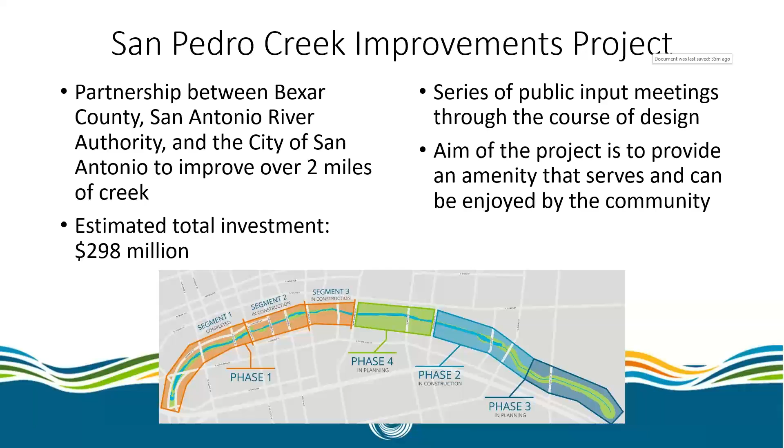It's very important to note that this project is a partnership between Bexar County, the City of San Antonio, and the San Antonio River Authority, improving a little over 2 miles of creek, about 2.2 miles. There's a phase map there, and the segment we're talking about is shown as segment 2 in phase 1. The estimated total investment is about $298 million. Bexar County is the primary funder, and this is a flood control project. However, our local leaders and elected officials had a vision: instead of just expanding the channel into another trapezoidal channel, they wanted to create a public amenity for the people who live and work in San Antonio and Bexar County. As such, there were a series of public input meetings throughout the course of design to get input from the community. Our aim is to create an amenity that serves our community and tells the history and culture of San Antonio. Next slide, please.

Flood control is really the main goal. San Pedro Creek catches about 45.6 square miles of drainage, direct runoff throughout the downtown area, as well as the stormwater collection system that drains into the creek. So even a very small rain event can cause a dramatic rise in the elevation of the creek's surface. Right now we have about 30 acres in the downtown area that flood during a significant rain event, and we're trying to eliminate those flood events. That's not the only project goal, though. Water quality is a core value of the San Antonio River Authority, and we have many features along this project that will help clean the water going into the creek. Economic development is also a plus with any public works project—from this investment, they're estimating about $1.5 billion in return over a 20-year period.

This was very much a grassroots design effort. We had a series of public meetings to get the community involved and get feedback on the design for the project. We ended up making some fairly significant revisions in response to that feedback, but we really want to demonstrate the culture and history of San Antonio. Carrie Brown will be talking a little later about the interpretive planning effort to do that representation. Next slide, please.

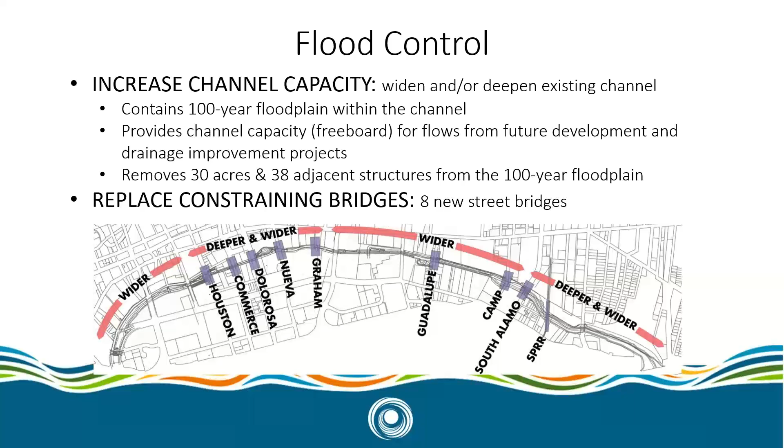Ultimately, the goal is to remove approximately 30 acres from the 100-year floodplain, and there are 38 structures currently in the floodplain that would be removed. To accomplish this, including the Houston Street Bridge right near the site and subject for this meeting, we're replacing about 8 bridges so that we can get the wider cross area under.

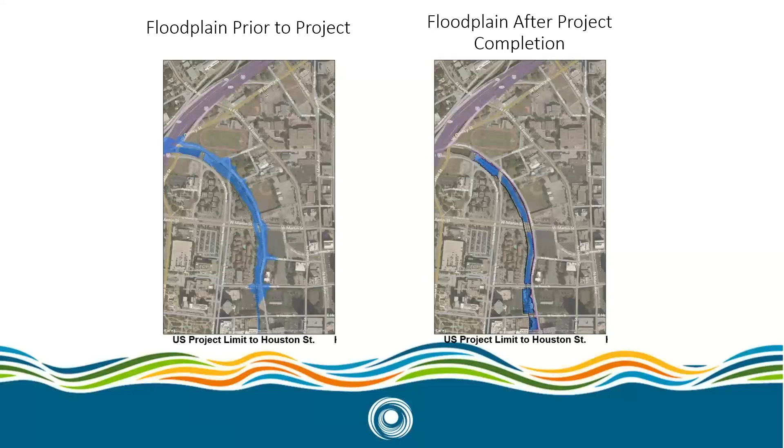Next slide, please. Real quick, these photos are showing the areas upstream of Houston Street. On the left is the before picture for the floodplain. You can see all along that area, we currently have some flows that jump the banks during a 100-year rain event. After construction, you can see the photo on the right. The intent is that we would contain that floodplain within the channel.

Next slide, please. So in early 2020, I believe it was around March, when they were doing construction near the corner of Houston and Camaron Street, there next to the Alameda Theater, they started to uncover some foundations.

And as we continued to investigate and the archaeologists got in there and continued to work with the contractor to uncover, we discovered it was a series of foundations, and there are several there.

Now, this discovery has stopped us so that we can see how we can incorporate the foundations into our design. And the design team have come up with several options that incorporate some or all of the foundation, also taking into account the project goals.

One thing that I think is very important is that we believe all the goals do represent a good historic representation of what happened in this area. We think that they all have a good representation and represent the culture and history of everything that happened here. The question is, which option will incorporate all of the goals and meet all the goals to the best degree possible. Next slide, please.

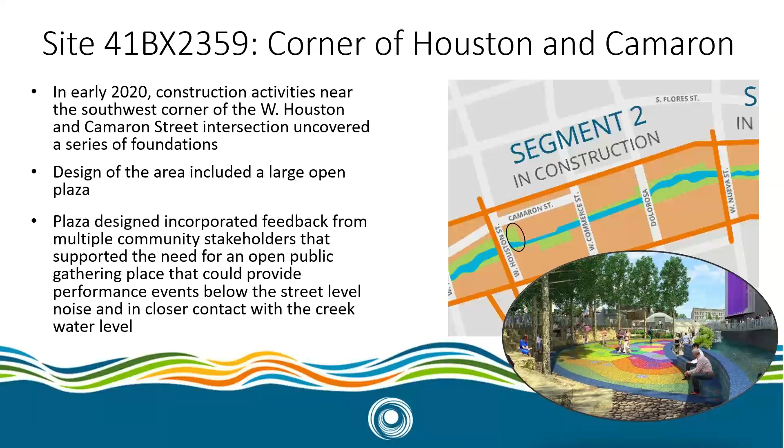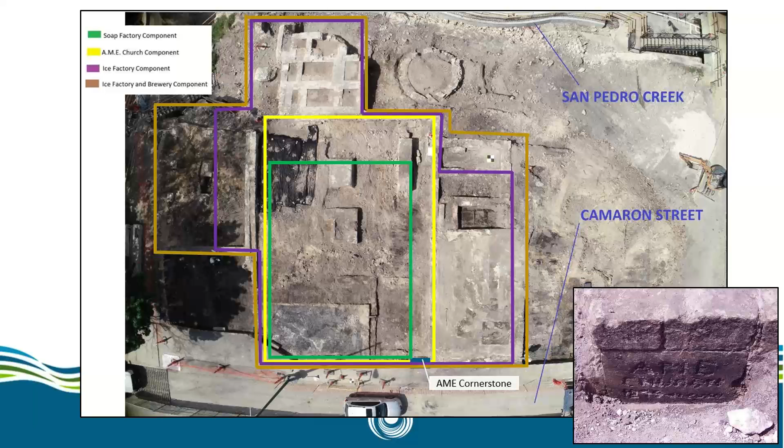Next slide, please. A quick run through the timeline. We are looking basically at a total length of occupation and use of this area that we are interested in, that is represented by these foundations, of roughly 57 years.

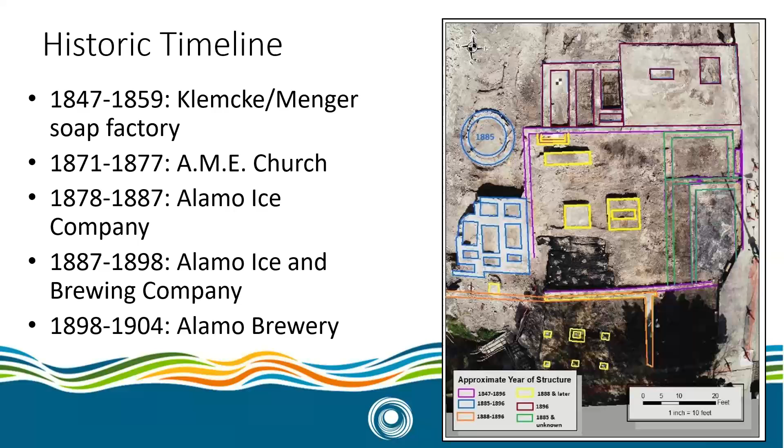Each component runs from anywhere from 6 years in length to 12 years in length, and really cover that 57-year period, beginning in 1847 and ending in 1904, when most of the complex is torn down and filled in, and later a parking lot is built on top of it. Next slide, please.

The very first, the oldest component, the occupation as we refer to it in archaeology, dates from 1847 to 1859, and it is the soap factory component associated with the Klemcke and Menger families. These are two immigrant German families who came to this country during the middle of the 19th century, right about the time when hygiene standards were increasing following the Civil War and the large number of deaths resulting from infections on the battlefield.

So when they arrived, the need for soap and increased hygiene was already present in the country, and they occupied a really important role both in Texas and in San Antonio specifically by the manufacture of soap, not just for their own use, but also for use by the larger population.

The first to own the property was Mr. Klemcke. He sold it in 1851. During the period that he owned it, he potentially built two structures on the site, then sold it to Simon Menger, not related to the Menger who owned the hotel. Mr. Menger owned it until 1859, when a flood of San Pedro Creek might have damaged one or both of those structures, and he moved his soap making facility further north on the creek, but he continued owning the property into the early 1870s.

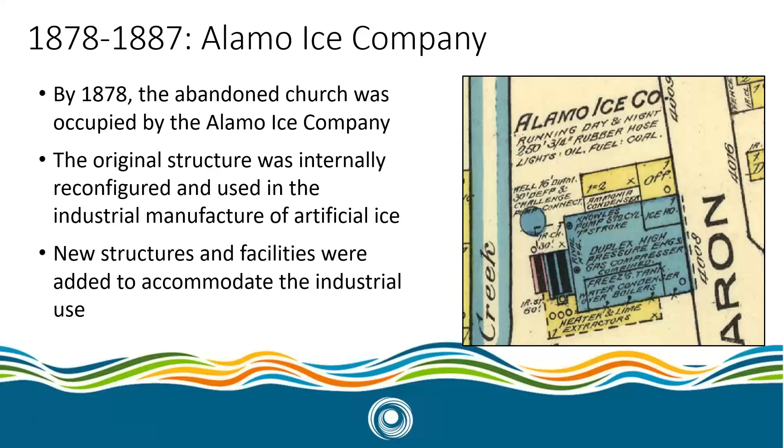By 1887, the Alamo Ice Company merges with, or has a marriage basically with, beer brewing. At this time, German beer brewing, lager beer brewing in particular, takes an important role in the States. However, because it needs cold fermentation, which is only allowed through ice and cooling, ice manufacturing and beer brewing become natural partners in this industrial process, and many ice manufacturing facilities couple with beer brewing to become this new, very efficient enterprise that allows for the growth of German beer brewing in the country.

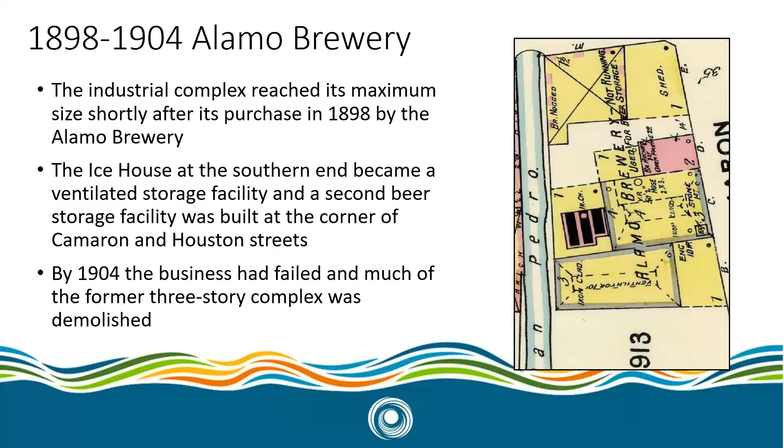So when we're considering the significance of the site regarding National Register eligibility, as well as State Antiquities Landmark designation, there are a number of criteria to take into consideration. Criterion A relates to events and specific historic trends associated with the site. Criterion B deals with individuals important to local history, the history of the site, state history, and national history. Criterion C refers to architectural importance and significance of the design itself. And criterion D addresses archaeological significance of the remains. This is an archaeological site because it's found below the ground, but it still could contain significant archaeological deposits, so we have to evaluate it in terms of all those criteria as well as criterion D.

As we are evaluating the site, we have to look at each component separately by itself. In our research, aided by the research of individuals from several offices, the Office of Historic Preservation, UTSA researchers, Clint McKenzie particularly, as well as members of the African American Community Archives and Museum, we have developed and defined that...

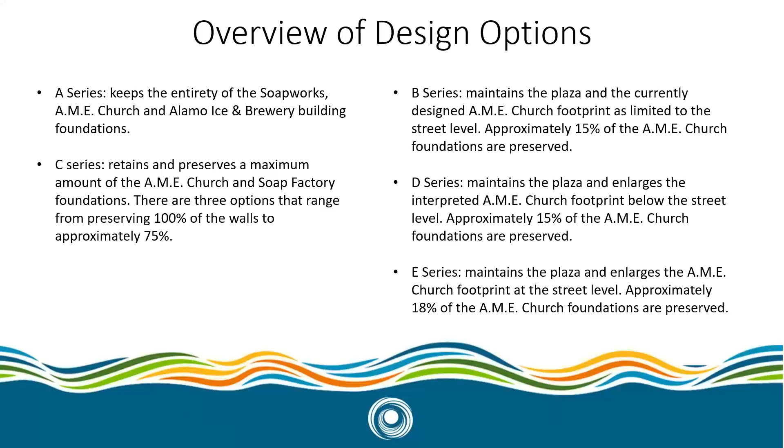And so we went through a series of options. I'll move on to the next slide because I think as we go through that, it explains it a little bit easier. But I did want to note that in most of the design options, the foundations that are preserved will be buried, and only surface interpretations of the foundations would actually be visible or seen by the public.

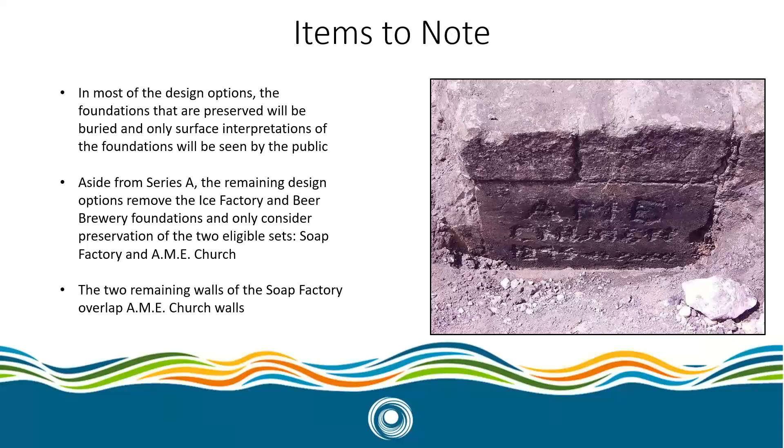And aside from the first option that you see, which is option A, the remaining design options really remove all of the other foundations other than the AME church and the soapworks factory.

So as we look at option A, which would completely redesign the current plaza area that we have there now, we would look at basically trying to encircle and protect all of the foundations that are there presently. And that's what this plan shows.

North is to the left, going upstream on the creek. Camaron Street is on the top, and Alameda Theater is on the lower part of this plan, and that'll be the same for all of these.

And in this particular approach, if we were to do that, we would actually have to go back in and narrow the channel that we've widened at this point, just to allow some degree of flow through the area. We'd have to take out the West Bank Paseo that has already been constructed along Alameda Theater. So that's what this represents.

Essentially, we'd still have to take care of the exiting that comes out of the east wall of the Alameda Theater, bridging across to the East Bank on the north and south. We would have to redesign the restrooms, probably just a single restroom and not the restrooms that we have now, and rethink how we treat the surface area of this particular scheme.

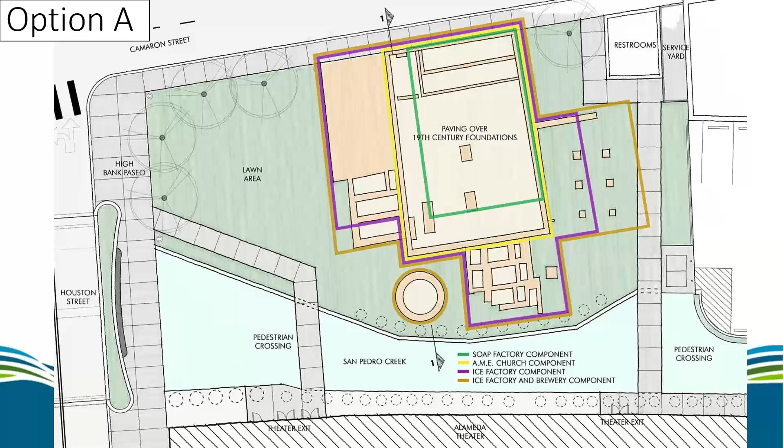If we could go to the next slide. And so the impacts on this, we show this right up front to know that if we try to keep everything that's there, it really doesn't meet the flood control project goals at all. It leaves no capacity in the channel to accept flows from future development, and there are already projects planned to alleviate flooding in upstream neighborhoods.

That's very similar for many of the projects, and Carrie Aver had mentioned that earlier. Any kind of flood event over 100 years is not going to be contained in the channel. And regaining the lost flood control would require substantial disruption of the preserved foundations, either to bore a tunnel beneath or to temporarily relocate the foundations to allow installation of culverts below them. So trying to mitigate the possible negative impacts on this is a very difficult challenge.

In doing that, basically we had a plaza, we still have the plaza design, but it would limit the capacity for events and programs that have already been designed. It would have the potential to reduce the amount of pedestrian traffic, less exposure to the history of the site, and we totally lose contact with the creek itself. It'd all be at a high bank. We would not have a low bank paseo, and that kind of intimacy of interacting with people and nature was something that was very important to this.

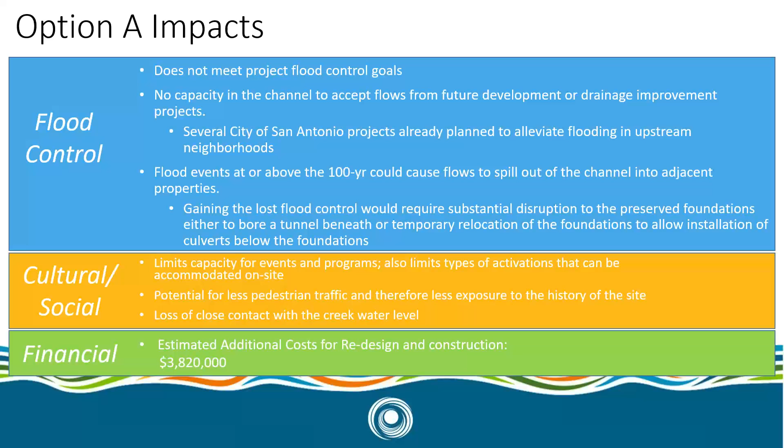The financial impact is considerable, thereabouts of $4 million, to basically go about making all of the changes to accommodate keeping the entire foundations. So that sums up option A, if we were to keep everything, and we can go on to look at a couple other options. Next slide.

So option B, basically this is the existing plaza design, and what you see in the top towards the right in the orangey area, that is the footprint of the AME church as it exists at the street level. The plaza itself steps down about 7 feet below the street level, and another 5 or 6 feet down to the water level. So this is kind of a mid-level plaza, and it would be carved into essentially what are the foundations of the AME church.

We show this because before we just had a surface treatment in terms of the paving for the footprint of the church. But in light of seeing the artifacts and knowing now the gaining significance of the memory of this church and the history that it had, we felt like making it a little bit more special, rather than just a change of paving pattern, would be important.

So option B1 shows raising up a low wall, kind of bench height, around it, just to buffer it off from the rest of the sidewalk. And option B2 would be the idea that you would actually excavate around the foundations and then have some sort of really elegant glass viewable walkway where you could look down on the foundations from the surface level. Both of those are two different approaches, but basically dealing with the footprint of the AME church at the street level and not having any impact, or marginal impact, on the current design.

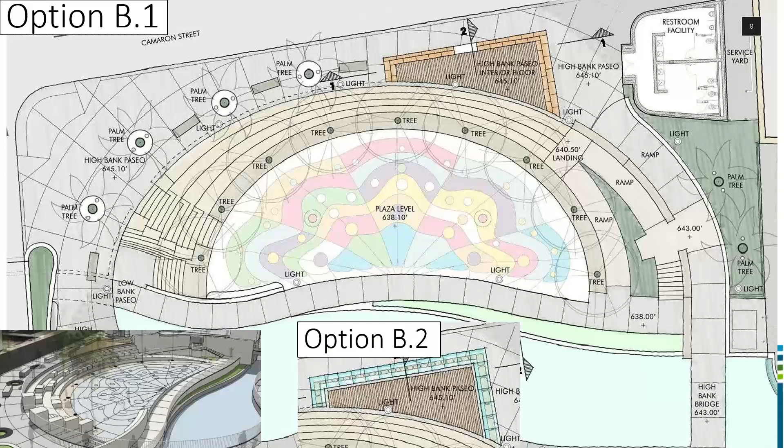And if you look at the next slide from this, really the impacts would be marginal. I just lost the screen. The impacts on that would be marginal. We may pick that up in a later slide in comparison.

But we moved on from that to think about something more substantial, because when you do see the history and you do see the actual archaeological site, you begin to understand the entirety of the church itself. And so for that reason, we looked at a series of options that basically try to preserve as much of the foundations as possible, if not all, of the AME church and soapworks, but also to be able to see at the street level the full extent of its footprint on the ground, the width and the length of it, to see what kind of space people were congregating in.

To do that, you have to retain those foundations, not unlike the first option, but a little bit more tightly. And so there's a very serious 6 foot thick pier wall out of concrete that has to be on its north, west, and south sides to protect those foundations from caving in and protect them from the flows of the river, the creek as it rises up. That footprint is about 40 feet by 60 feet. The foundation walls would be preserved underground and they'd be interpreted on the site.

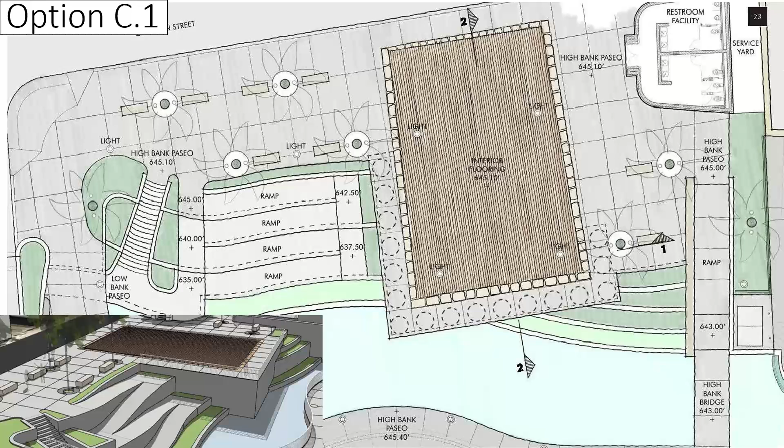We can move on to another alternate on this, which would be the next slide. This was to do two things: try to keep as much of the foundations as possible, and certainly still show a fairly full extent of the church footprint, just to understand its place in the space along Camaron Street.

But we would cut off the lower left-hand corner of it, essentially the northwest corner, and that would allow two things: the low bank paseo to continue on and engage an accessible ramp close to what had been originally designed, and it also starts to capture back some of the impacts on the flood control conveyance through there.

Now, we didn't do an entire new flood study on it, so I'm not saying this totally alleviates it, but it certainly may have still some impact, and it is an improvement upon the option we just previously saw.

And instead of having a ramp coming up at the street level, just having a grassy bank on the north side between Houston Street on the left and the AME Church on the right. And that is our second example.

And then we came up with one more variation, in the next slide, which should reveal. That is to basically still keep the full footprint by cantilevering a new structure out over that cut back corner that you see. We do have to start doing some other things, like lowering the grade elevations of the low bank paseo, having a little steeper slope on the grass.

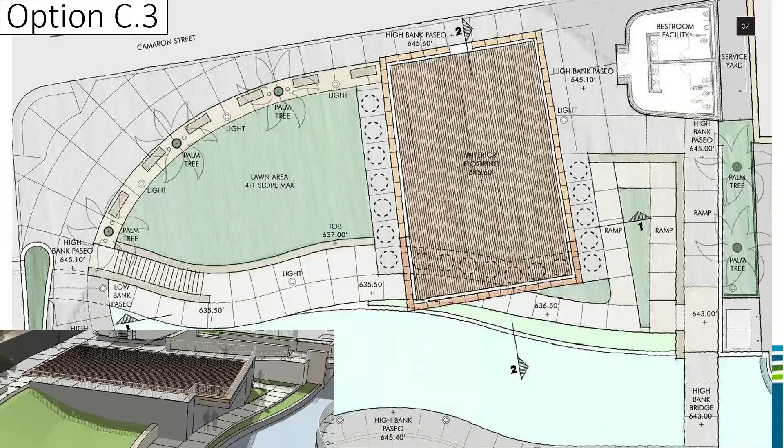So on those impacts, just to sum up, it still doesn't entirely meet project flood control goals. I think C.1 is more severe than the others, really repeating some of those same issues we have in A, where there's little or no capacity of the channel to accept flows. Floods above the 100-year could still spill out over the channel onto adjacent properties.

But in terms of cultural and social impacts, it does change the capacity for events and programs. There is an assembly space essentially within the footprint of the church at that point, but how it's used, it's not as ideal a performance space. It's at street level, not below, so there are noise issues and things like that. It's a little more difficult, not as ideal, and really not a performance space, although it's a reasonable gathering space for some events.

Of course, in option C1, there was all ramp and footprint of the church, but C2 and C3 add some green lawn and retain the low paseo, so a little more desirable. And all of those are really pretty much in the same financial impact range, about 2.2 million to 2.3 million.

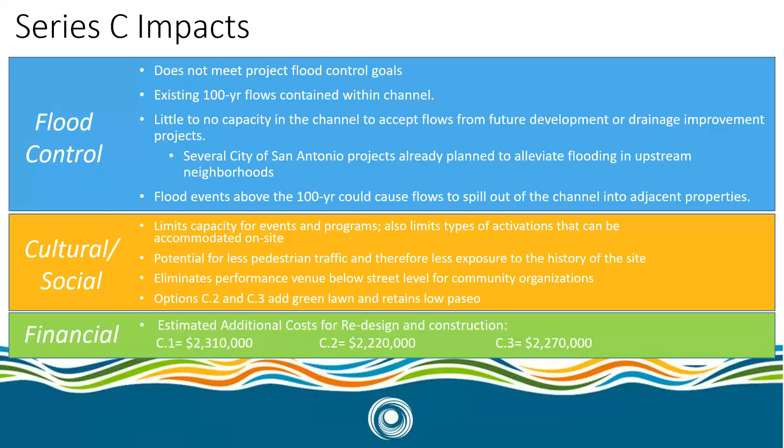So let's move on to several other options that we looked at. In these two options, we attempted to do something that is a bit of a hybrid of retaining foundation walls and also interpreting the footprint of the church, but still trying to maintain to some degree the existing plaza design and function.

And in option D, essentially that is raising up, showing the perimeter of the wall around on the north, east, and south sides along Camaron Street, but extending the footprint of it, the floor area if you will, of the church, out over the terrace, the stone terraces that we have along the perimeter of the plaza.

And the level of this would actually be lower, closer to the actual floor level of the historic church at this point. Keep in mind that the grade level historically is about 3 to 4 feet higher than it was 150 years ago. So this actually gets you down close to the level of the church floor, and then would expose the historic foundation walls around it, or actually walls at that point, because you're at the historic floor level.

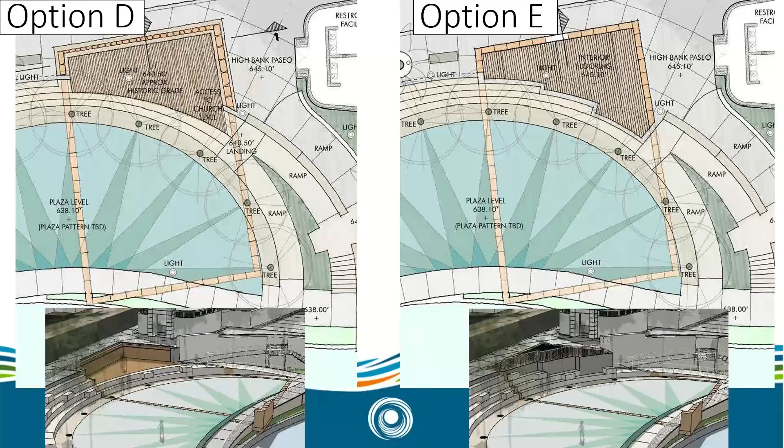If we move on to the next slide, the impacts of those last three that we looked at: they do, of course, all maintain the project flood control goals. That was the intent of investigating those. It does maintain the intended event use for the Alameda Theater, Texas Public Radio, River Authority. It provides the seating and shade that's needed. It's still a large public gathering place below the street noise and in closer contact with the water, et cetera. And it is ADA accessible for the low bank paseo.

It keeps that intact. And there is a range of costs on this. Really the first two, which were just keeping the plaza as is - the first one, more simple, just under 900,000; the other about 1.3 million. For the last two that we looked at, D and E, where it's more of a hybrid condition, both of them are basically about $1.2 million. Next slide.

All right, Steve, those were all the slides on the design options. Thank you. Right. Yep. Thank you. Now we'll move on to interpretive strategies with Ms. Carrie Brown, Public Art Curator.

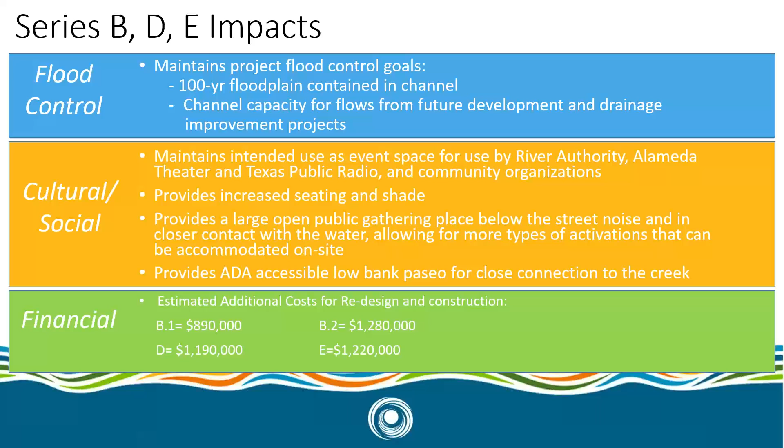Good afternoon, everyone. I'm just going to take a quick couple of minutes to go through the interpretive strategies that we have implemented at the park and continue to implement as different sections open. So next slide.

So first I wanted to start with our interpretive panels, a photo of which you can see on the right here. These are currently implemented at the park. We currently have 18 of them. And the topics for these panels come from our interpretive plan, which we completed last year with the help of a group of community experts. I believe Monica is going to touch on that briefly in her presentation.

But just to say that one way we can interpret information here at this site particularly is to have a panel dedicated to that site, and that is our intention. All of our panels are written by local historians, and then as needed we bring in subject matter experts to correct for accuracy and also to provide some additional information. And then we also take all of our panels to the Bexar County Historical Commission for a final review. So that's one strategy that we have implemented and will continue to use.

Another strategy is digital delivery of information, and this includes our website, which is spcculturepark.com. This is a place where we can include a whole slew of information for those who want to take a deeper dive. We can also link to other resources and organizations that are out there, again providing that deeper level of information for those who are interested. And this also includes our mobile app as well, which you can download for free.

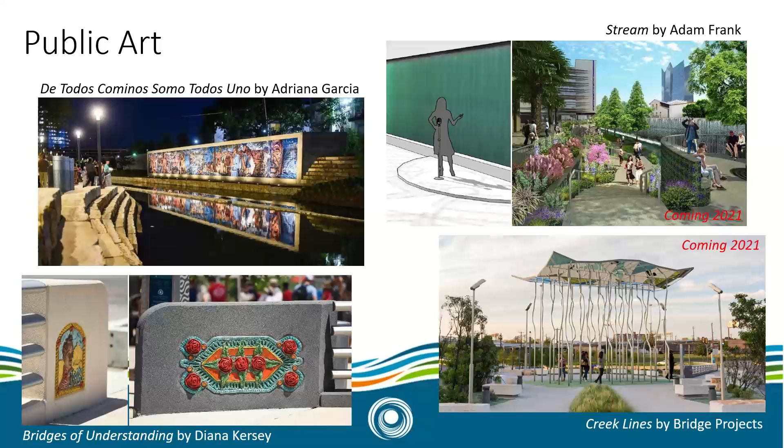Great, thank you very much, Carrie. Alright, so I'm just going to move on and talk briefly about our previous efforts of public involvement on the archaeological site in general.

We completed an interpretive plan for San Pedro Creek Culture Park that was executed by Dr. Ann Toxey of Toxey McMillan and Associates, as Carrie had mentioned a little while ago.

The interpretive plan is an initial step in the planning and design process for informal learning-based institutions like parks and other cultural facilities, where interpretation is used to communicate messages, stories, information, and experiences. So it's a decision-making process that blends management needs and resource considerations, visitor needs, and the desires to determine the most effective way to communicate a message.

It definitely incorporates elements of culture and history, and it guides the design of the project and also complements the master public art plan. So this effort entailed an extensive process for researching and collaboration, and it was a good year and a half in the making.

And for the interpretive plan effort, Carrie Brown and I facilitated a committee of 21 members of the community, ranging from historians, community leaders, and appointed subject matter experts. They provided guidance to Dr. Toxey on the interpretive plan and the interpretive sign topics.

And the AME Church, Soapworks, Alamo Ice House and Brewery, and Klumpke were all topics most definitely included in the interpretive plan and the interpretive signage, fully recognized and vetted by this group. And this was all before the archaeological discovery.